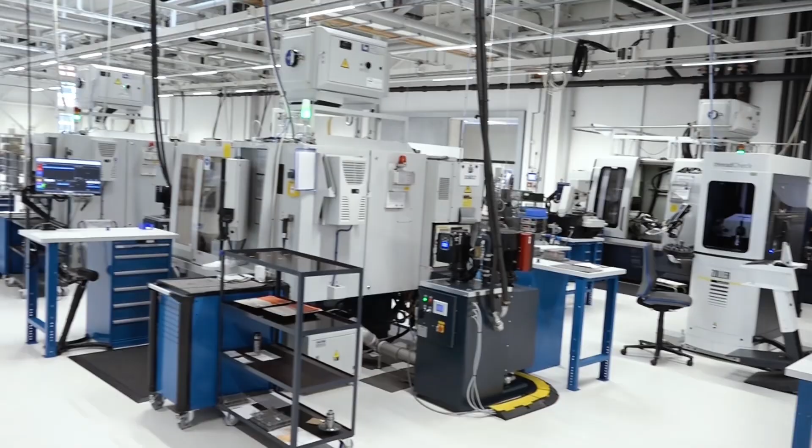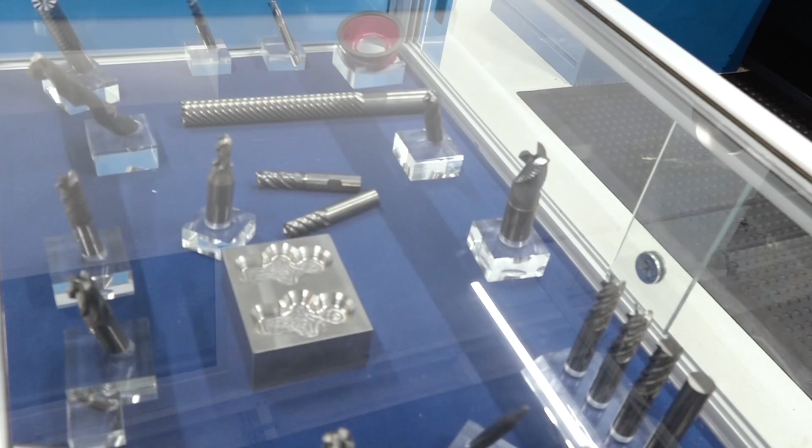Absolutely, for the audience that's for sure. I'm already seeing dozens and dozens of grinding machines, which is obviously the core of what you're doing here. Absolutely, solid carbide is our passion for precision. You see here different tools, mostly different diameters and lengths, but more of the bigger ones here. So there's really powerful grinding technology going on with these Rheinecker machines here.

You see also how we produce those tools. First of all, there's always a rod, and we put it in the machine's clamping system, then we go with the grinding wheel in a slotting process. So the main material of the tool gets removed, and then finally we sharpen and finish the front part of the tool. You see the ones with a lot of teeth here, those are finishing tools. We grind for such a tool about 60 minutes, so an hour for one tool. There are other ones we produce faster, but it's really different here.

You know, I come from the machining world, and currently we discuss all the time doing things in one operation and reducing cycle time. Are you doing the same thing inside the grinding machines, putting in raw material and taking out a finished cutting tool, doing your very best to combine operations and take cycle times from say 30 minutes to 5 minutes? Are you doing all of that to keep your production up with the demands, because you guys continue to grow globally?

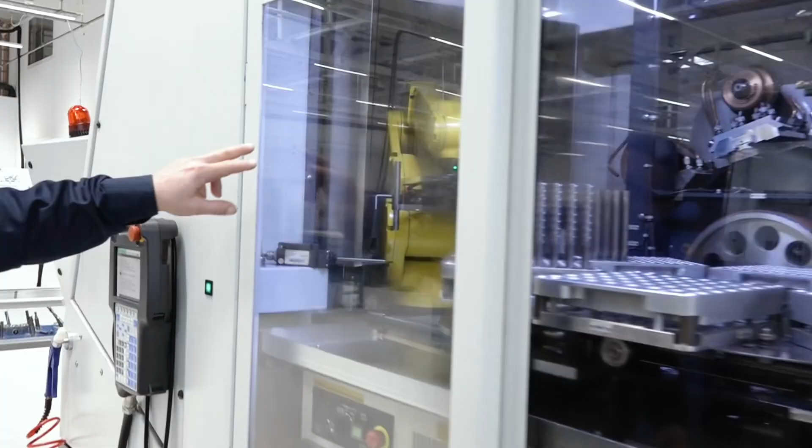Yeah, absolutely, it's important. We're standing here in the Switzerland production, and you know, the salary is part of the price to produce out of Switzerland. Most of our products go out to Europe, the United States, China. I have international competition, and producing out of Switzerland is expensive, so we have to optimize our process. Therefore, automation is really important. When you look in a machine like that, you see the robot still holding the rod prepared for its operation, and at the back side we see the different grinding wheel packages. We've optimized during the last year not only the grinding strategy but also the grinding wheels, with metal bonded wheels that we can dress with EDM technology.

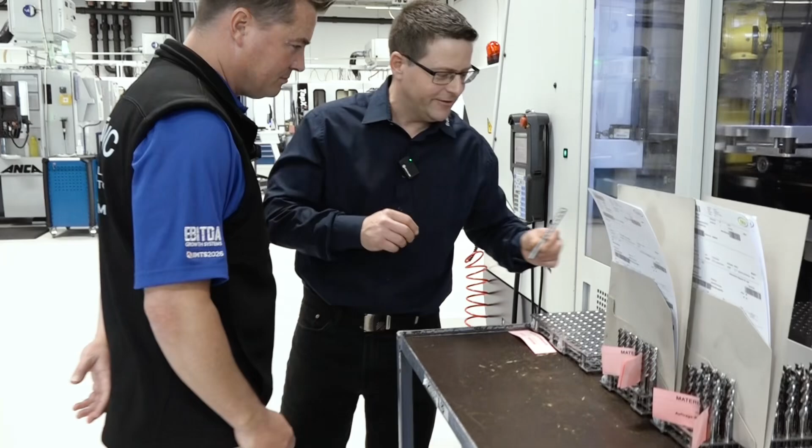So that's really important, and I look at those products here. This is a multifunctional tool, not so sharp, it's a steel end mill. So Tony, don't worry, I have sharper ones. Good news, thank you. Yeah, but I'll show you that afterwards. This one on a machine is also 6.3 times the diameter in length of cut, so your machine can cut a workpiece in a whole. But what does that mean for us here? I also have to grind that really long cutting edge, so that takes a lot of time.

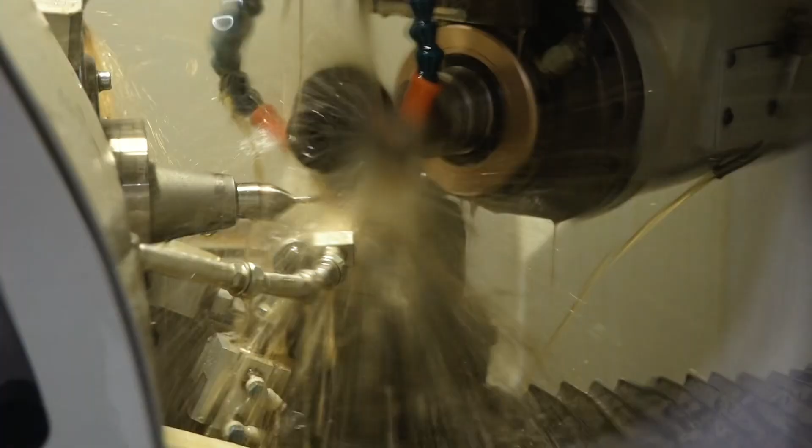It's really important that we are performant with our grinding strategy. Stefan, coming from a machinist background, in my younger days I would hesitate to utilize this tool at full cut. But you would advise people to utilize the whole thing, wouldn't you? Yep, absolutely. And that goes into your strategies and quality as well.

The grinding part, Tony, is one thing. The developing before, that's the whole story - to create a tool which is able to do that not only once or twice, but every day. What does that mean? I have to offer the product also knowledge - how you have to do the strategy, the programming, all that. We will see that later. That's a main part of our intention at Fraisa - giving not only high performance products, but also knowledge on how to use them.

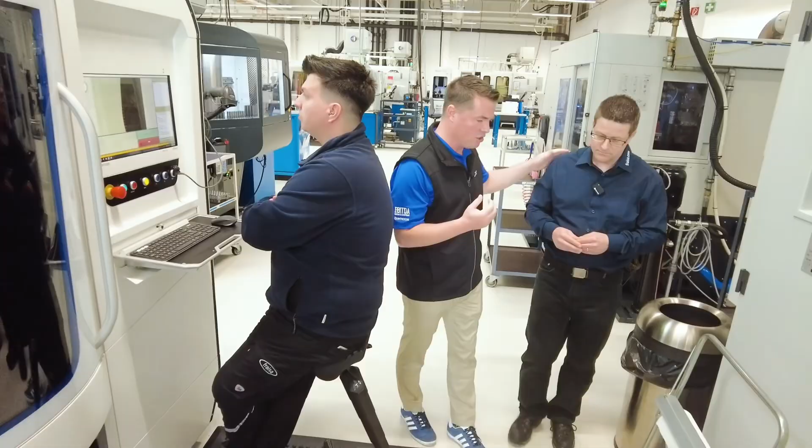Stefan, that is one of the major details I want to talk with you about on this tour - the in-depth wisdom that you and your team have here that you provide to your customers. You have milling strategies, you don't just offer a cutting tool. I used to get cutting tools and have to figure it out on my own, but you offer milling strategies.

Now that's a segue we're going to talk about in a minute, because I want to step back to the importance of automation. You've already pointed out the robots. I look around and I see them everywhere throughout the facility. I see a few people here, but a majority of those machines are running on their own. What do you think is the importance of automation here?

The importance of automation is for sure the infrastructure, but on the other hand also products that can integrate into an automated production. So in development I still have to think how I can produce this tool, in which tolerances I have to be really precise, and where perhaps I have a bit more possibility to increase the tolerance. So focusing on the production development is really important.

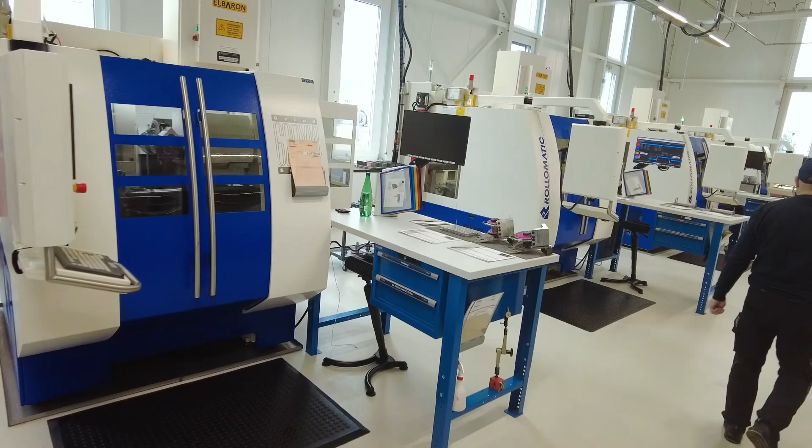And on the other hand, we invest a lot of time yearly to make automation better combined. You see here, for example, our smart pallets - perhaps we go over there, we will see that. So I know at the beginning of a production, here with its smart pallet, you see the RFID chip on it.

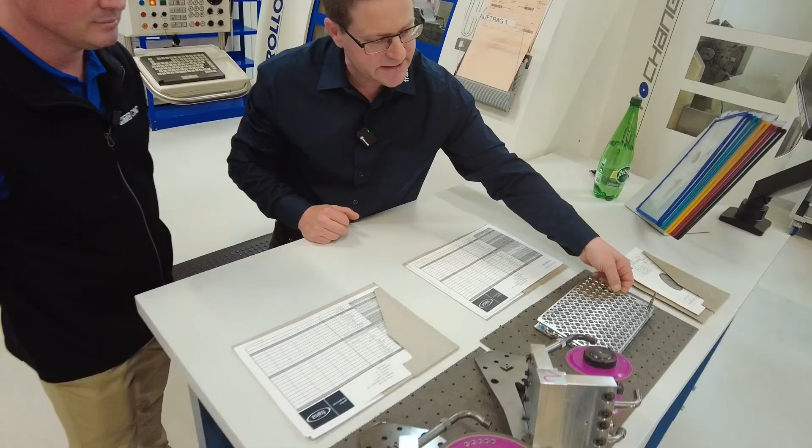So the tool rods get prepared before, also with the robot, in the smart pallet, and from the beginning on I know exactly - this is this tool, this is this order, the machine knows it, and finally this pallet goes until the end of production with the tool. So that's also one part of automation. And you see here also the grinding wheels - the grinding wheel is such an important element of our production for the quality, for the wear, the stability of the process. So all of this combined finally makes automation even more performant than we've had in the past.

Truly a great answer, Stefan. Thank you for sharing that. Let's slide over this direction - we have so much to see today.

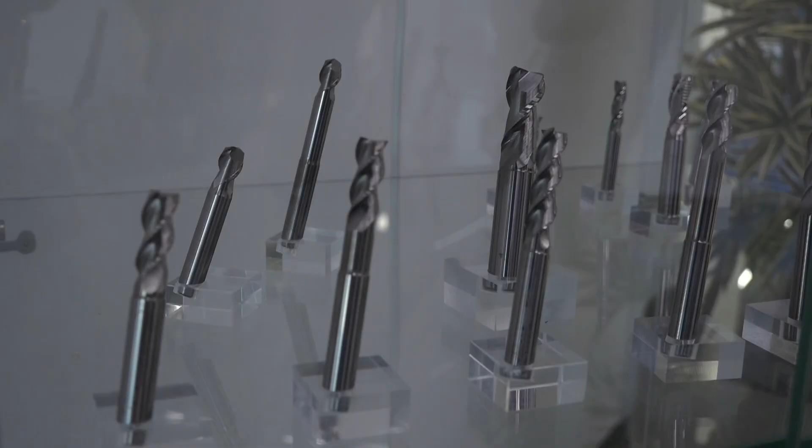And I want to go back to what I segued to before, because when I think about Fraisa, I think about a company that started in 1934 - so we're over 90 years of development, and you guys pride yourselves on being the best. This quality product, from the design, from the automation, to the coating, which is so important, to being able to measure everything, because you can't make something if you can't measure something, right?

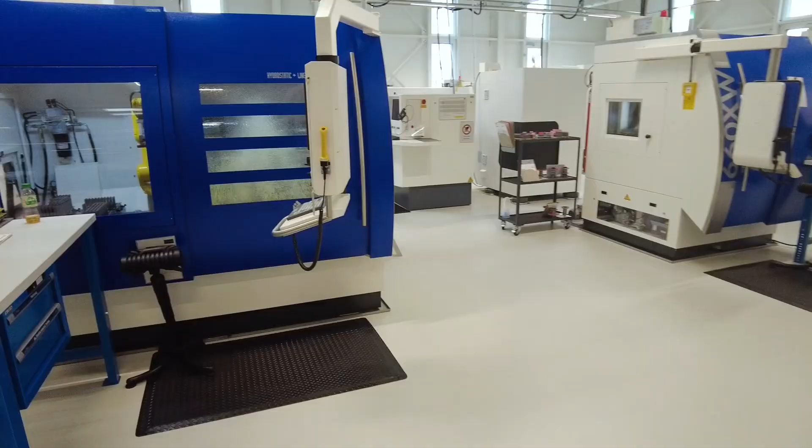Absolutely. And your philosophy, stepping back to what we brought up earlier, is you want to make sure that when people work with you, they have a full solution. You've created the ability on your website to pick a tool and understand the tool and understand the process. It's not just about giving you a call and saying, hey man, I need a 10 millimeter tool and I'm cutting aluminum, or as we say in Europe, aluminium, right? But it's not - we're not doing that here.

You are giving a full solution. Can you describe to the audience what 90 plus years of dedication to that understanding and partnership does for anyone who invests in a partnership with Fraisa? Yes, thank you very much, Tony, for giving this question.

The basis of all that is 90 years of experience and culture.

We began with the technology, the tool technology, the performance. That is the base. A tool has to work daily and annually, always on the same performance level. But that's not enough. The performance level today is so high.

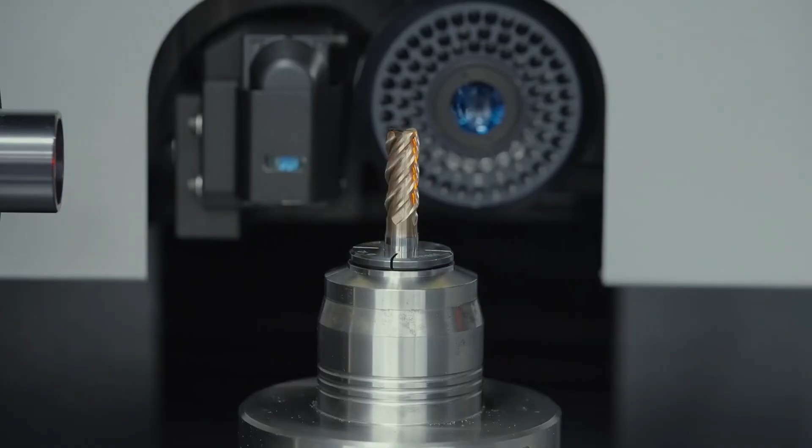The question is always how we transfer this performance level to all our customers. So we have to give knowledge with it, and we integrate that into our tool expert, our tool software.

Therefore we invest a lot in trials and developments to do that. But finally we need partners to create this whole story, this milling system. We need partners in automatization, in production technology, and also in applications technology. We can't do that ourselves.

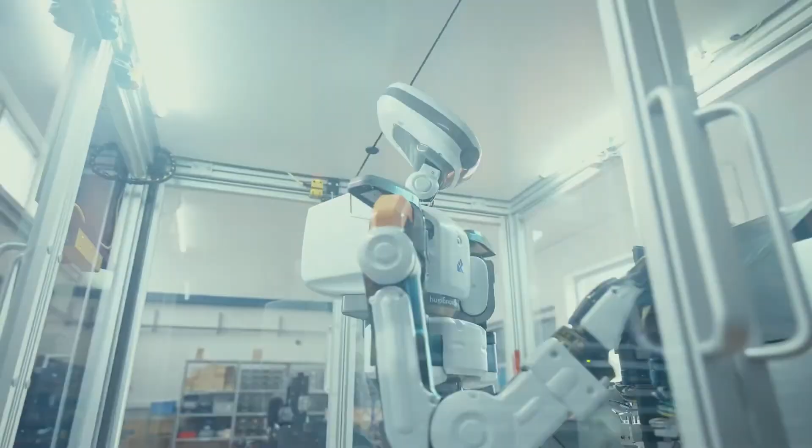And one important part: it doesn't help if we are just freaks and specialists in here. We have to transfer it to the market, and therefore our sales and application engineers are daily with our customers, guiding them, helping them implement those products with this quality and performance, understanding their needs and problems, helping them and giving us feedback. So that's a sharing of knowledge, of culture, of willingness to go together into the future.

That's what we stand for. We are really open to discuss, always with transparency, what is to do, where we want to go, where perhaps we have certain opportunities to work on. And then we go into it and always stay critical and validate ourselves to guarantee quality.

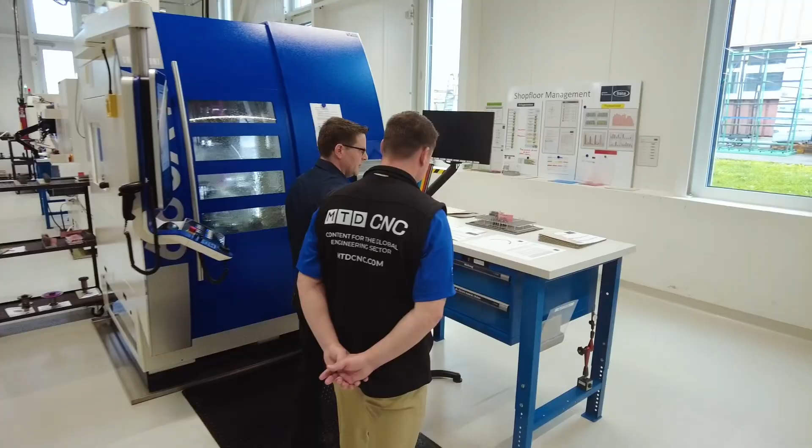I can give you an example, this tool. This is a high precision ball nose tool. It's not the most precise one we do, but you see here the tolerance we've got. We are talking about microns here.

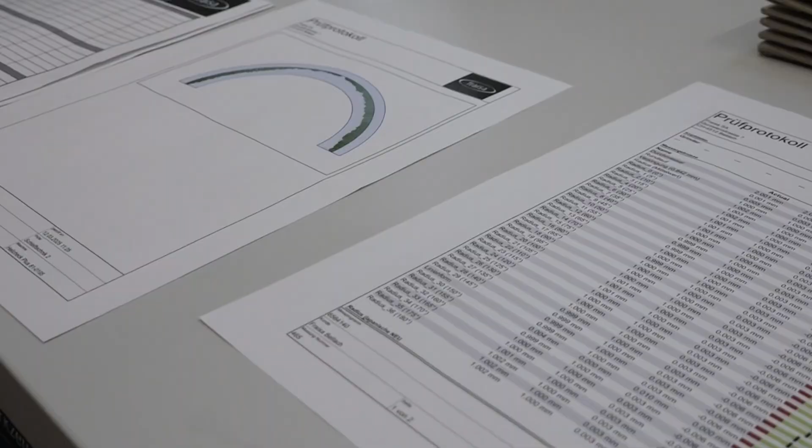The radius of the tool is plus 3 micron, minus 6, and here it's measured, and that's also a Fraisa element. The tolerance of a ball nose is over the whole nose, and you know, with two teeth, it's really difficult to hold in the front of the tool.

Look at how many measure points it takes to hold exactly this tolerance. For our customers, it's so important that they can get exactly this diameter, program it in a CAM program, and know the mold will finally be in the exact quality they need.

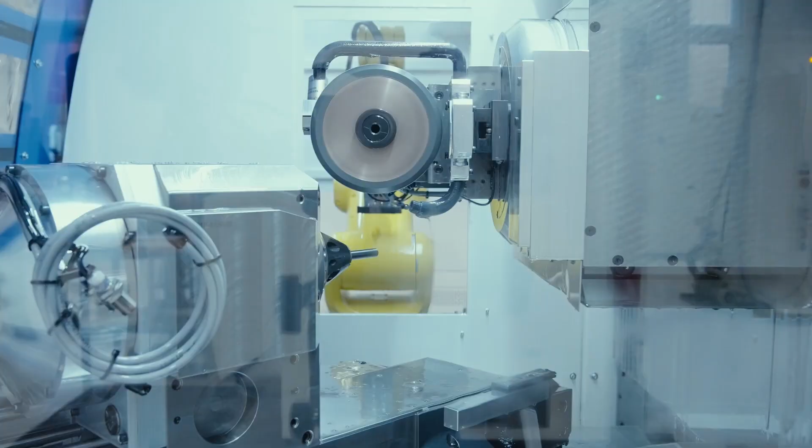So that's also a service we give with our products. The performance and tool lifetime of the products has to be state of the art, but here that's an additional one.

Something I want to slide into, because we're going to head in the general direction of grinding, and that's another one of your areas that's quite fascinating to me. But along this journey, I want to talk a little bit about your eco-friendliness and your awareness of energy consumption.

Energy consumption has been an issue around the world over the last few years, with costs doubling, tripling, quadrupling. It's very important to you at Fraisa and to some of the partners here in Switzerland to do everything you can to reduce costs. Would you describe what efforts go into designing a cutting tool to reduce energy by maybe 20%, 10%, or 30%? And can you translate that for the audience so they understand what that 20% means, maybe in terms of driving a car?

Yeah, absolutely, Tony. Thank you very much. That's also a personal intention, to reduce energy consumption, and we still have a lot of possibilities to do that. I can give you an example.

I developed a tool concept that we launched in 2023, named eCut for Alu, for aluminum machining. The task was to make a really smooth cutting tool, smoother than anything we'd achieved until now. In the past we always added a bit more security pressure, a bigger rake angle on the tool, so that was okay. But with this new development, we reduced the consumption of spindle power by 20%.

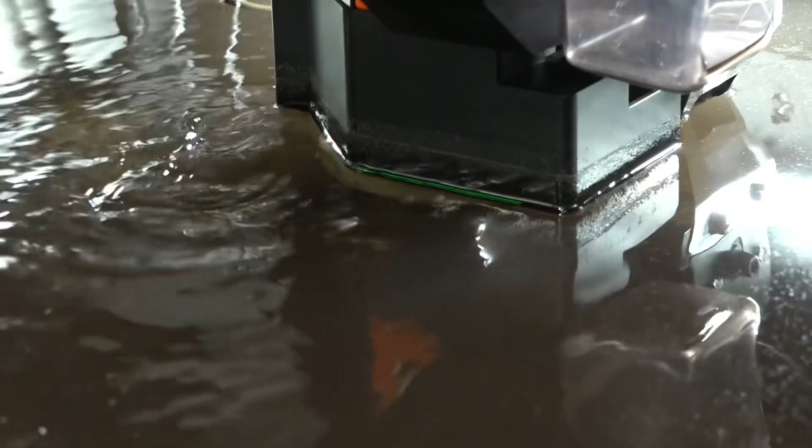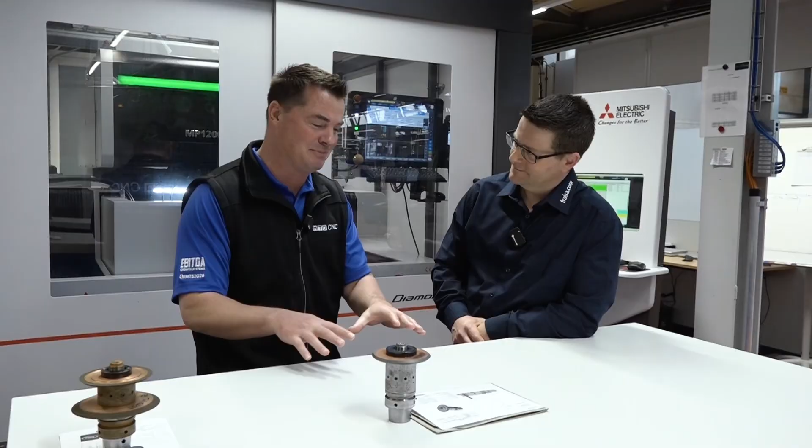You're far more familiar with this than I am, but I know the concepts of machining a part and the concept of making a tool have a lot of similarities. You're constantly trying to multitask inside a machine to create new geometries, for eco-friendliness, for part production, or for longer tool life. In the industry we're in right now, a lot of folks would probably agree there's a constant competition between software, cutting tools, and machines. At some point the machines are ahead of the other parts, and sometimes the software is ahead. Currently, cutting tools are ahead of everyone, so everyone else is trying to catch up at the moment.

So instead of making the coolest and best technology, what you are doing is really trying to figure out how to make these tools last longer and how to make more of them within a machine in a shorter amount of time. And that's the concept of this whole grinding area, isn't it?

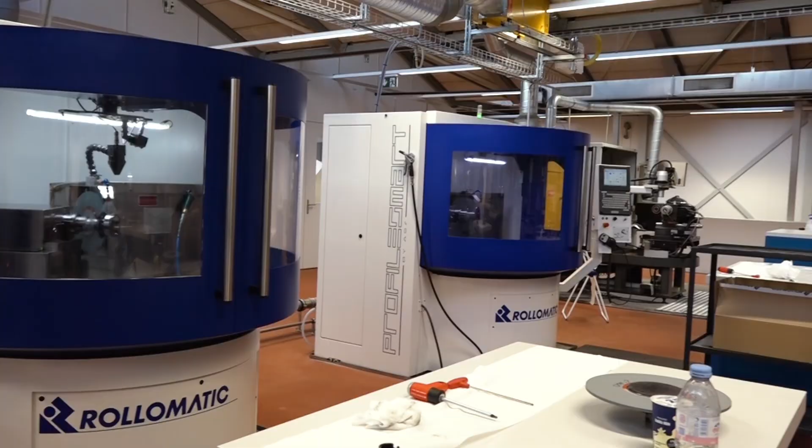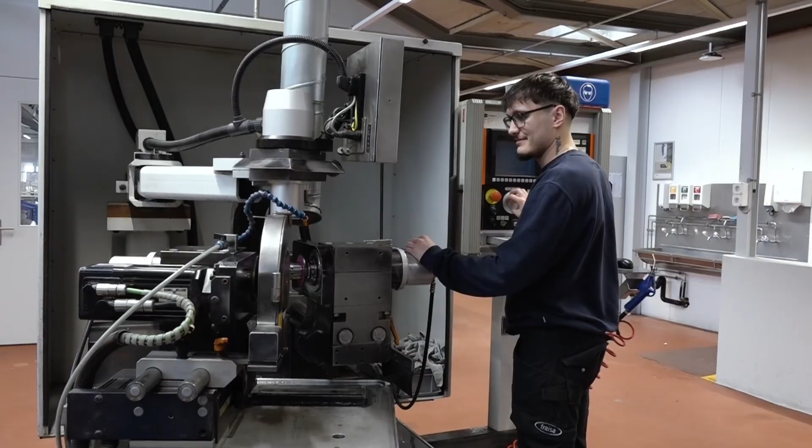Yeah, absolutely. The grinding wheel and the perfectly dressed grinding wheel is the base. You saw all the machines there and the tools there - without the grinding wheel, they don't work, nothing happens. So therefore this department here is named the Grinding Wheel Competence Center. The dressing of a grinding wheel, the quality of the grinding wheel is so important, because you want to hold this tolerance, as we saw before, those microns during the whole series of production of those end mills.

And therefore those specialists have special grinding wheels also developed with our partners. Their partnership is important too - we can't do that ourselves. We receive the grinding wheels, metal bound grinding wheels, or dual grain grinding wheels. This, for example, is something really special.

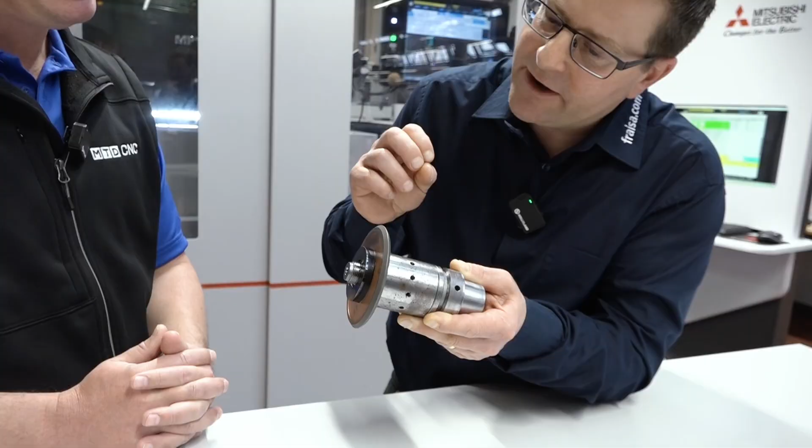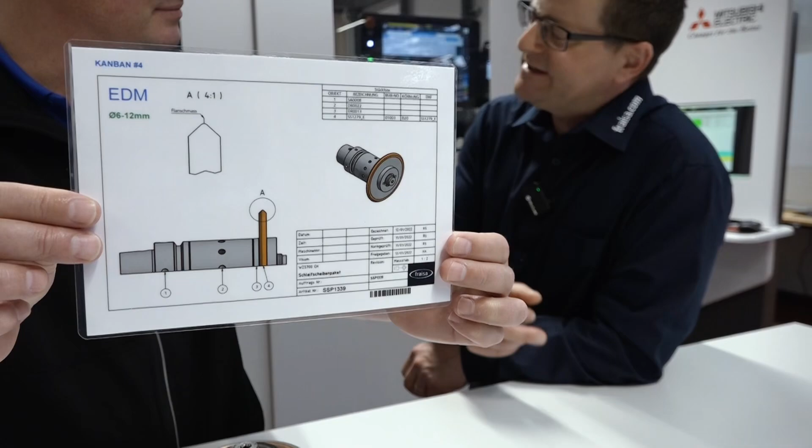This is a grinding wheel for a chip breaker, for a special chip breaker system that we developed. I'll show you that afterwards on a machine, and I have high-speed camera sequences showing you what's going on with such a chip breaker. But look at that - that is such a special form of this chip breaker, so smooth are the transitions.

And we developed - I invested about 7 years. Seven years, I lost a lot of my lifetime years. But Tony, you know, we are all fascinated, so I invest that gladly.

Amazing, amazing. All right, let's slide over this way, Stefan, as we move into an area which I would lightly describe as the beginning of the end process, where we're starting to clean it, where we're starting to put on coatings, where we're starting to package it, and we're going to show all this.

Would you mind describing your company culture here as well? Because you've recently won an award that I would describe as for the people, by the people, where there's an anonymous posting process - and you know how mean people can be online when they have no regard for anyone because you don't know where it's coming from - and yet you guys won that award because your culture here, you really take care of one another. Yeah, absolutely. Look, you see a lot of machines, you see a lot of technology, but the core is still the human, the teamwork.

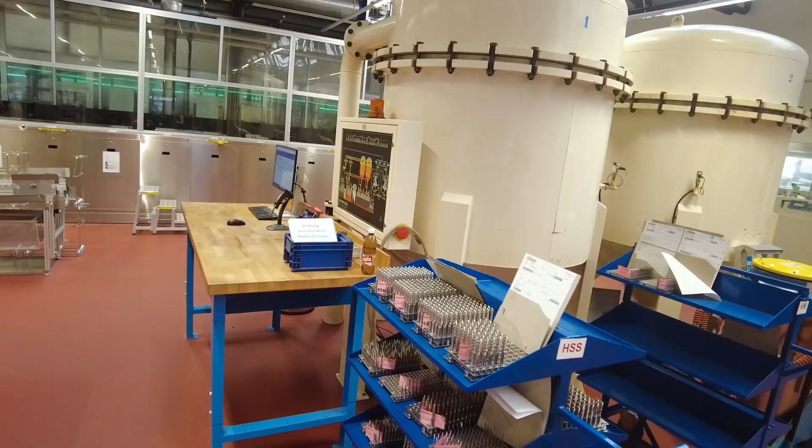I can't do that myself all alone. I need everyone setting up the cleaning process. For example, this machine, this specially developed cleaning process with over 13 cleaning steps to guarantee that the tool is really well cleaned before we apply the coating. So I need partners, I need humans, and it goes on finally in the production, so that I can guarantee every day the same quality of performance.

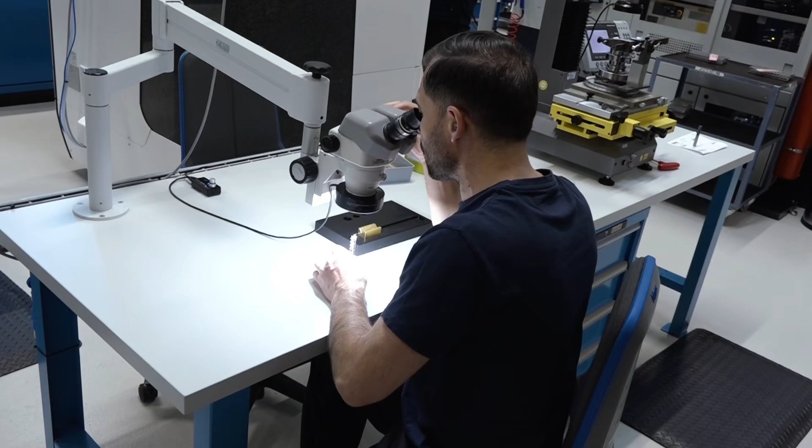I need humans. Also the measuring, I have to develop the measuring method too. I need people that can interpret the results of what they're doing. And therefore we need teamwork, transparency, but for sure we also need process. And that has a lot to do with culture, Tony. Be open, be transparent, talk about what's not going really well, but always do that in a manner of fairness and respect.

Very, very well said. I had to take a moment of silence listening to you because I love the culture here. You say it out loud, but I can see it in all the people around as well. Every time you walk into a room, people are smiling, working diligently. They look like they love their jobs.

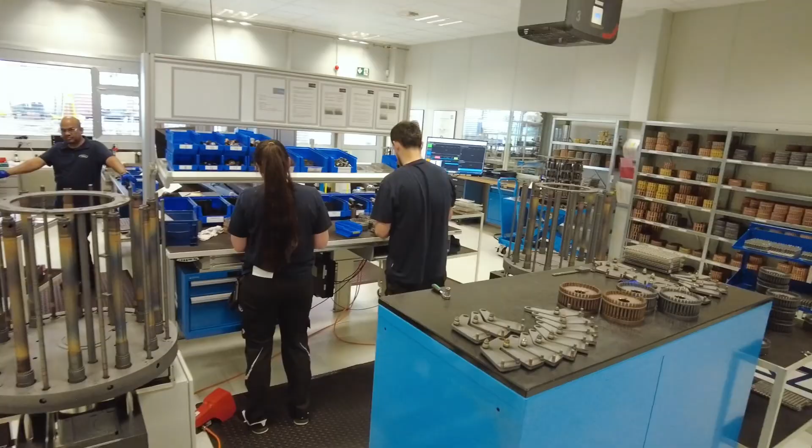But let's segue a little bit from the culture and people to actually what the audience is looking at right now. In this room, we can't touch a thing, can we? No fingers. Absolutely. Put your hands in your pockets, right?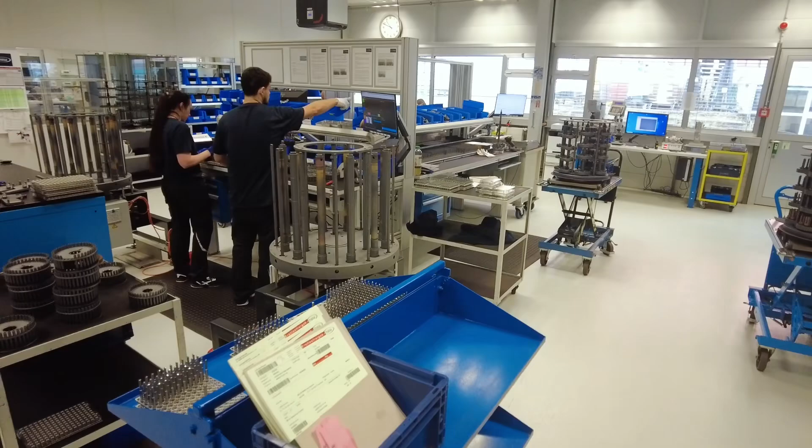You're absolutely right, Tony. So here all the colleagues are preparing the satellites to then finally apply our high performance coatings on a tool. You'll see them wearing gloves here. If you touch a tool, even your fingerprint on it can damage a whole coating charge that we're processing in this room. It's so delicate, you can't imagine how delicate it is when a tool isn't cleaned really precisely.

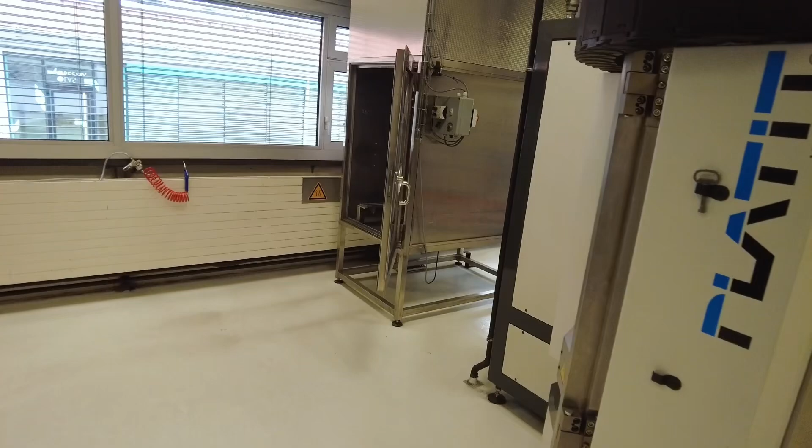You don't see a lot here now, but we are in our coating department. You see different machines running, applying our coating recipes. A recipe uses several hours here to put the coating on a tool, and the influence of a coating is incredible - for the tool lifetime, for the performance, and also for the reduction of energy consumption, because modern coatings are so thin and so fine that it has a big influence on the evacuation of the chips out of the tool. So we invest in our own development, for sure also with partners, but that's a core element of our production.

Just for fun, if I was to take 100% of a process, what percent of that would you label the importance of the coating? It's a really big one. Yeah, it's a really big one.

For sure, we have the substrate, we have the geometry, and we have also the coating influence. So if you don't have good raw material, as always, then you lose performance. But a coating is a main part, I would say. I can't say directly a percentage, it depends also on the tool type, the machining material. But I would say it could be in certain cases 50%.

So really impressive, the influence of the coating.

And from the outside looking in, Stefan, when I think about a process that certainly you know more than I do - I mean 20 plus years, the company's been around for darn near, it's been over 90 years. I was going to say darn near 100 at this point, and by the time some people watch this video, it might be - this video will live forever. But when I think about that, I think geometry has been around a long time. There's a lot of mathematicians out there, a lot of science that goes into the certain angles presented to make the right cuts and the correct materials. But I almost feel like coating can be a secret sauce as well. Maybe that area is a piece of also why you're so globally successful and known as, if not the best, one of the best cutting tool companies in the world.

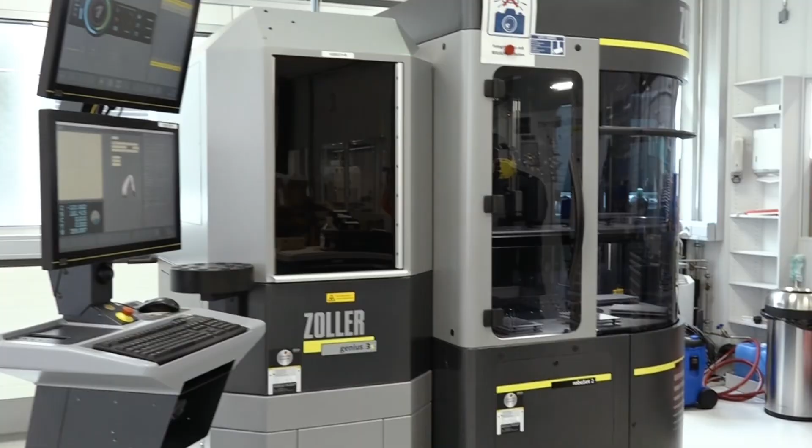I can measure that with a 3D scanner, more for macro geometries, and compare them. But we've also got really precise measuring machines here, where I can measure less than a micron because of the geometrical technologies we have today. Elementary influences, like a supporting chamfer of a tool, are really complicated to measure and reproduce, and there the geometry is the big influence. On the other hand, when machining stainless steel, titanium, or nickel-based alloys, the coating is really important too.

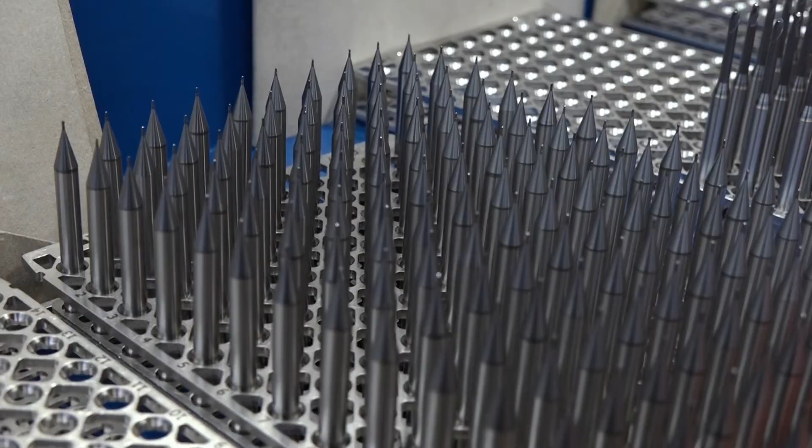So I think it's important to know, for each application, which tool elements are key. We talked before about efficiency in production too, so always making tolerances smaller isn't a good way. You have to know where precision is important and where it isn't, so we can also optimize the production of tools.

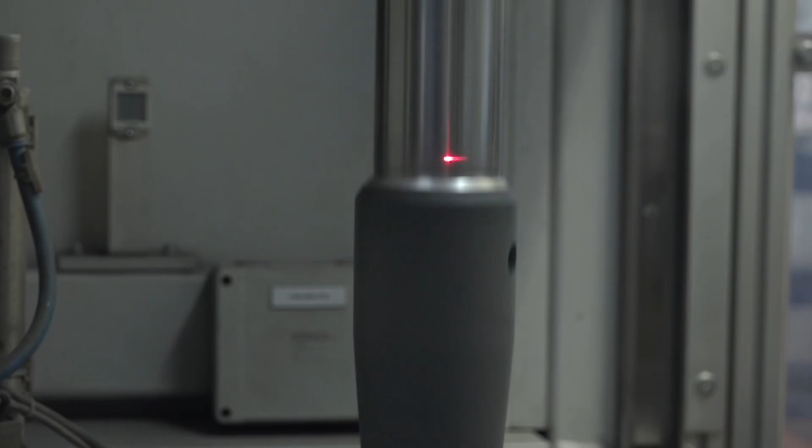This is why I bring people like you on camera, because you're the expert and we get to learn so much together. So this is the quality department. We're going to head to packaging, but I bet these guys would argue they're the most important people here, right, the quality department? I see them smiling - they know the importance of what they do.

All right, packaging. Man, I got to be honest, when I did packaging I was doing it by hand. You were doing everything within a system here, and you're even being eco-friendly about that. Can we walk through and describe the process here?

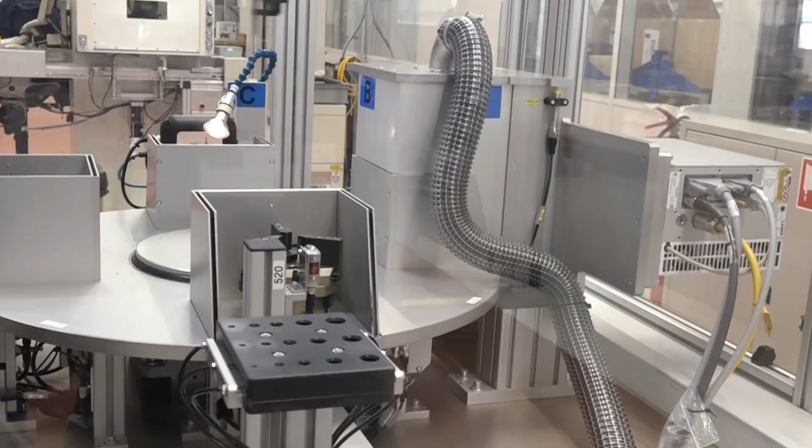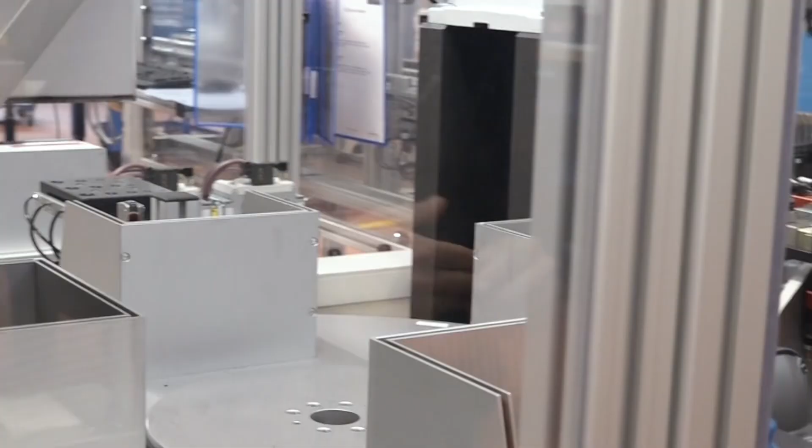Yeah, absolutely. Look here, the tools are coming, they're now finished coating - look at the golden shining tools you're seeing, I think that's a diameter 3 or something like that. The tools get picked by the robot and go directly into this part of the machine - that's the laser, putting a unique number on every tool. So I know finally this tool has its own number, and in 10 years when it's still in use, I can say it was produced on the 13th of March.

And then it goes through the station here. This one is a little bit special - it goes into the packaging, the blue one, into the package, to close the package.

You know, while we move to this next section, I can move almost as quick as that robot. How about you? Yeah, well, I'm almost as quick, I could probably do close to the same. Obviously I'm kidding, that thing is flying.

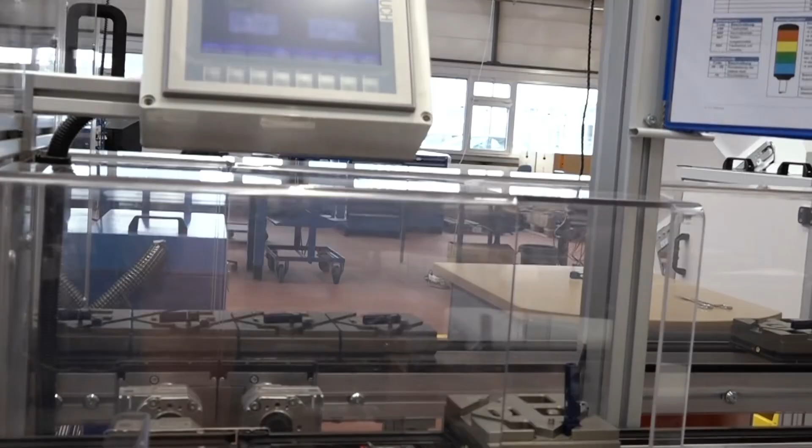It's flying, that's really fast, and he doesn't have to go to the restroom - he doesn't stop in the evening, he works on, and that's the big difference. Even if the robot is a little bit less faster than you, he works. And that's also boring work - we're always saying here, Tony, the boring work has to be done by a robot. Dull, dirty, dangerous, right? Absolutely.

And we have a lot of other stuff our good colleagues still do here. So eco-friendly packaging, correct? Absolutely, eco-friendly packaging, recycled packaging.

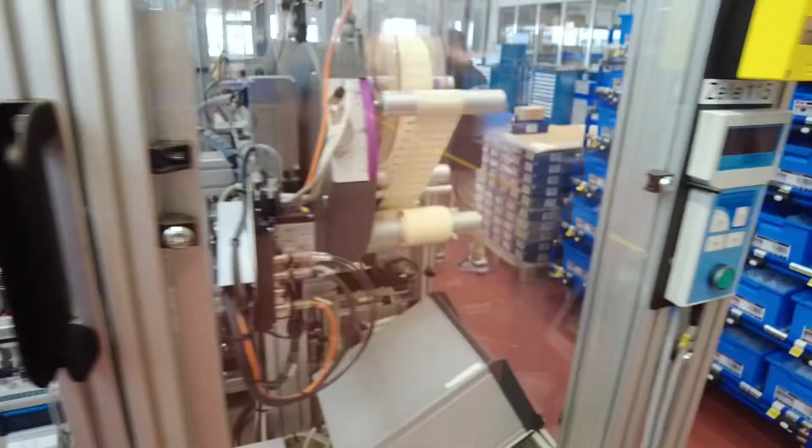Well, it looks like we're getting to a completed product, which means we're probably getting to the end of the tour as you've taken us all the way through. And I see that when a product gets completed, all the data is collected from that as well. Absolutely, all the data for every single product is finally saved, stored in a database.

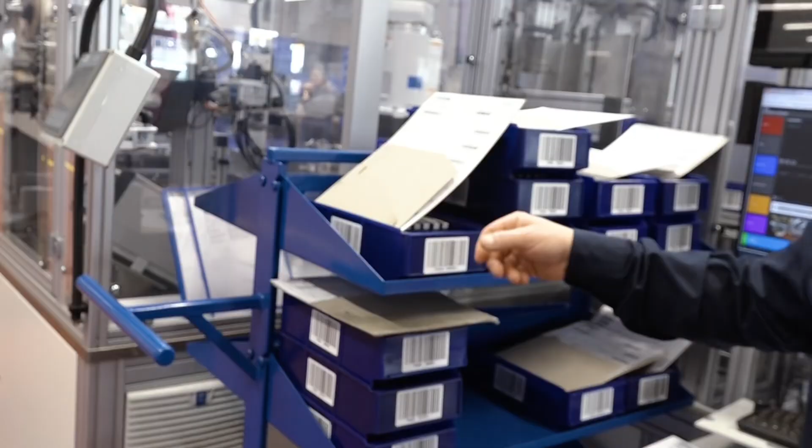But Tony, yeah, the product here is finished - the package goes finally to stock, and our customer can order the product. Yeah, beautiful, well packaged, but it's not yet finished, Tony. It looks finished, we made it to the end of the factory. No. What am I missing?

No, here it begins, Tony. What I want to do with the product sitting in packaging - we have to machine with it. And what does that machining mean? It means, Tony, that we need good employees, trained employees, new colleagues learning how to machine. You'll see also CNC programming, which you know well. A little bit. So we need knowledge, and therefore we have our department building up new apprenticeships here. One of my favorite topics, brother.

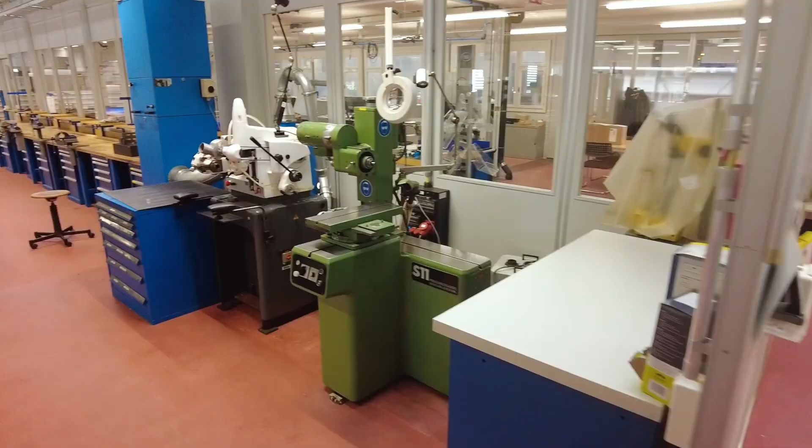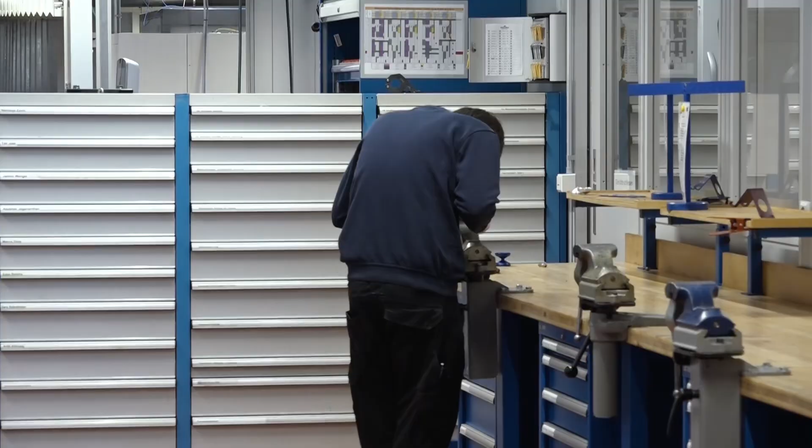I remember well in the 90s when I made my first CNC experience. Here you also see conventional machining, which is how we learned and we've kept it around. You feel the chips there - drilling, turning, and milling, also conventional. This is important still, that you have the feeling of what's going on, the forces, the temperature, and the mechanics - what it means when you turn a wheel and the material sticks up. So our colleagues learn how to handle all that, grinding competence, but also CNC competence.

Stefan, I think this is where we stop for now. But I think you have an entire machine shop we have to dive into, don't you? Absolutely, and that's my favorite day. Oh, I love that too. I like the production, that's necessary. But what's more beautiful than machining, making chips, understanding what's going on, and feeling the power we invest in it too. So Tony, let's go over to the lab and make some chips. Absolutely, man, let's go take a look. I'm very excited, thank you for that. Thank you for watching, stay tuned for that video as well. We're headed there right now.

It feels like home, I tell you, the machine shop feels like home here. Here we are, Tony. Yes. Welcome back. Great, I'm so excited to film this video as well.

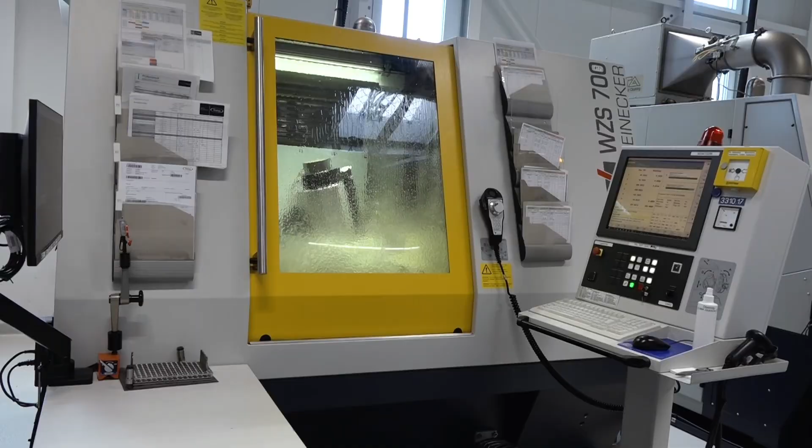R&D is one of my favorite topics because it's where we get to figure out what we're doing right or wrong. It's important to know both, and also important to know what's not good, because then you can prevent customers from issues with those products. You saw we produce really nice tools, and without developing, it's not possible today. You can't develop a tool on a green table and just put it in a catalog - that's not a good idea. So we invest a lot of time in this department, R&D - really strategic trials, really analytics, not just playing the same way every day.

Stefan, I want you to clarify a rumor for me - I've heard that you guys actually do R&D 2 to 3 years into the future to make sure all these tests are done correctly before ever releasing something. Yeah, absolutely, that's true. I'm finished now, beginning of 25, with the products for '26. That's still being developed - I'm working on '27, '28 developments now. It takes time to understand.

A product I'll show you afterwards on a machine, I develop over 12 to 24 months, and make about 70 prototypes to finally define the product, reproduce it, and know the technology. Because I don't just have diameter 10, I've got it from 2 up to 20, from short to long - you saw the 6.3 times diameter over there. So that means you have to test it, otherwise you won't have a good feeling putting it on the market, you don't sleep well at night. I couldn't imagine throwing something out into the wild and saying 'good luck, we think it works, but you go spend a lot of money on our tools and try it out for us.' That's not how it works.

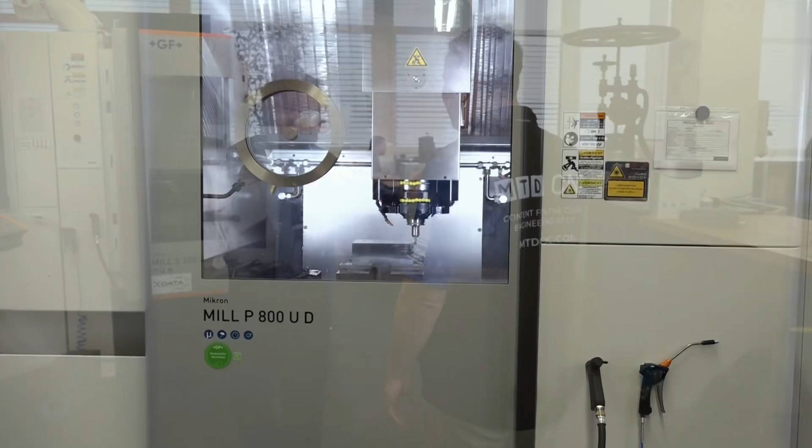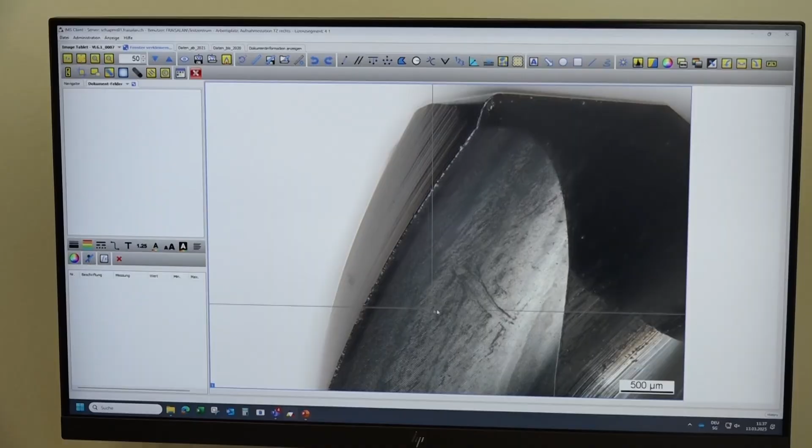Do you have a demo set up over here we can take a look at? Absolutely. Here are machines - they're machining for a certain time, the tool is in action, and then after a while we look at the wear. Wear analysis is still one of the most important things. You hear the noise, you can measure the consumption of power, force, and all that. Look at that now - 90 minutes machining in construction steel, which is not really easy to machine. You see the wear on the tool - look how regular this wear is, you don't see a lot of material addition here. So that's what we're doing.

We're machining, comparing tools, understanding the influence of the geometry - whether it has to be positive or not. And I told you in the production, Tony, about this chip breaking system for the automatization. So I've got an example here for you to show a little bit what that means.

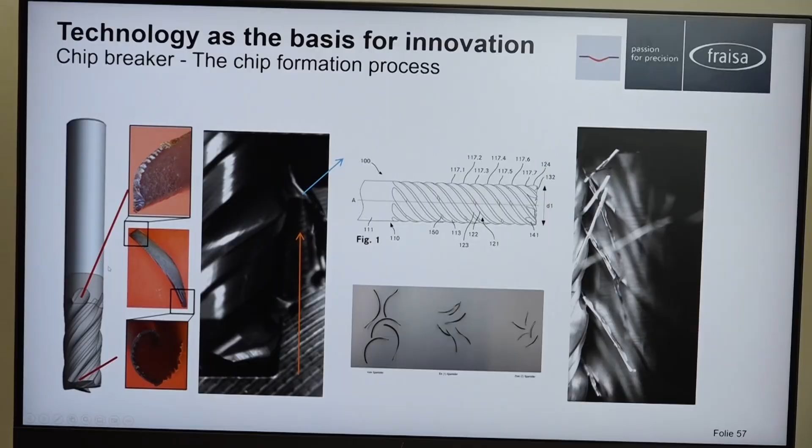So what we are seeing here is a tool, and you see here a chip built in the front part of the slot and in the end part of the slot. And when you look at that, how the chip gets formed—that's so impressive.

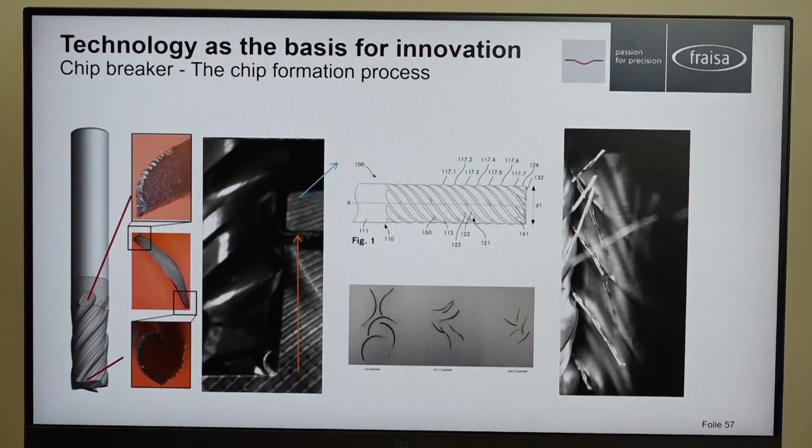It's incredibly impressive. I have a fast camera to do that—that's a really powerful camera to be able to collect that data. Absolutely, up to 200,000 pictures per second, Tony. So with a setup like that, really specialists can do that.

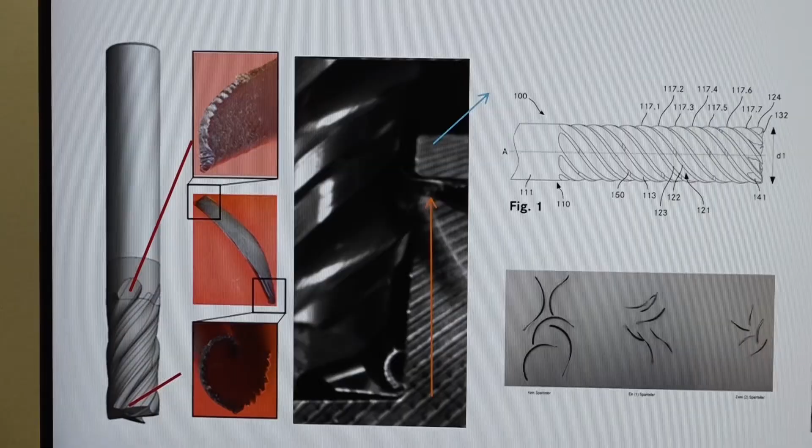So that's really helpful, you see a lot of things, but now look at that. The chip goes up in one way, so it's a long chip. Therefore, I have to integrate a chip breaker, interrupting this process, building the formation of a chip, and that is what we are seeing here on a second video. This is also a long tool in action, look at that, and then here you see finally the chip breaker—the chip gets broken, a new formation builds up, and like this we can cut the chip into several pieces.

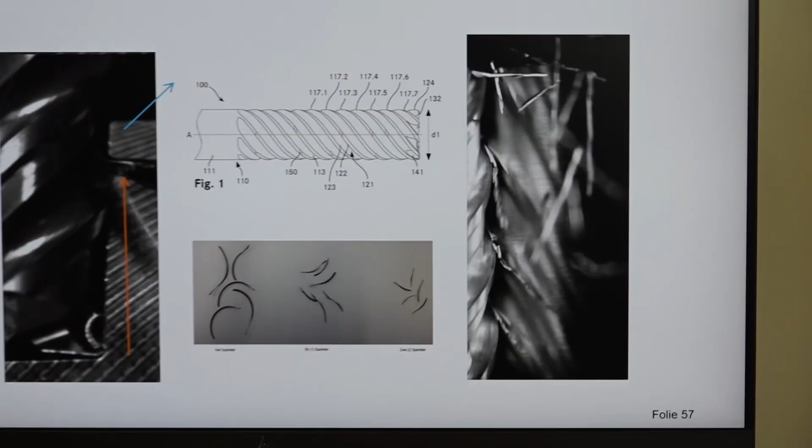That makes it more efficient to remove it out of the workpiece, out of the table of the machine, without interrupting the conveyor for the chip transportation. So technologies like that are really important to understand what's going on.

Would you say that recutting chips is one of the quickest ways to wear down a tool before anything else? That's why we're trying so often to either get coolant where it's supposed to be, use chip breakers, but regardless, we're trying to remove that material and get it out instead of rubbing or cutting the same chip twice and creating dullness in our tools.

Yeah, for sure—that's for the cutting edge going through its own chip securely. That's also the reason we integrate lubrication channels in most of our tools, and also the form of the chip. That's really important for a profile tool, for example. They can hook their own chip, and that's then finally a really bad situation when a chip can't be removed. So yes, that's our part here—thinking and looking at the chip formation, and it's really important.

I will show you afterwards a photo you will love. I love chips, Tony—I even go diving into the chips because it's such an important part of our work here. Perfect, let's continue our tour.

R&D is so fun, and I would pay to see you dive into a bucket of chips, by the way. Since you've already brought that up on camera, I'm gonna hold you to that. Yeah, we're gonna try and make that happen.

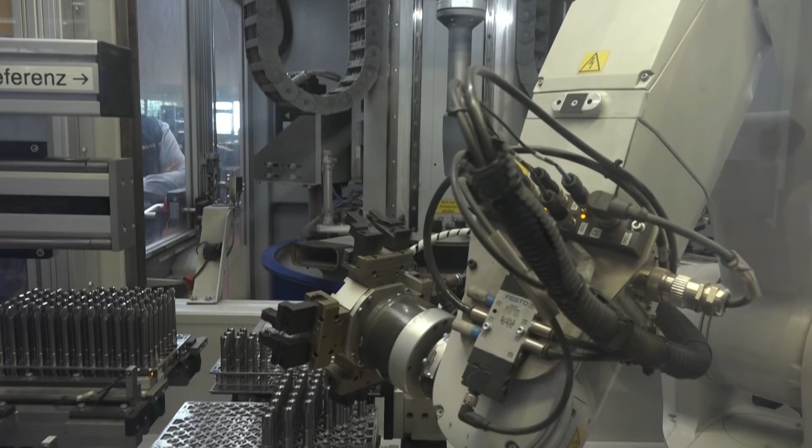All right, Stefan, I think of R&D, we're headed into production, but along this journey we've seen the production side of things, from you making the tools to utilizing the tools and testing the tools and packaging the tools and the automation, everything that goes into it. I've known you to be around for over 90 years now, and your dedication to your clients takes time, but it gives results, and it's a long-term relationship that you continue to build.

As a part of that, I've heard that you also do a retool—you make sure that if a customer invests in your high-quality product, they can utilize it more than once. They can send it back to you, use it 2-3 times. Now historically, when I was ordering tools, I always hesitated because I was told I was losing quality, but I'm not losing quality with you. I might use a little diameter, but can you describe your retool process?

Yes Tony, that's a really important discussion here. You see, we invest such a lot of energy producing those tools, so it's important that we can use this value that we invest several times. Therefore, it's its own part of the tool development that we develop the retool—the resharpening on one hand, but also the recoating—reproducing this 100% performance guarantee that we give to our customer. And yeah, we do that with our colleagues in Germany, where we run this retool process, and that we can guarantee this 100%.

I'm absolutely with you, because the diameter is less, the stability can't be the same, the deflection of the tool—that would have been my absolute question, with the same parameters. But you're absolutely right, we have to develop that, also changing small elements.

The tool doesn't look the same way, but it has to work the same way, and therefore we make validation. Every tool gets validated, and look here, Tony, what I've prepared. This is an example of a validation. What we are seeing here...

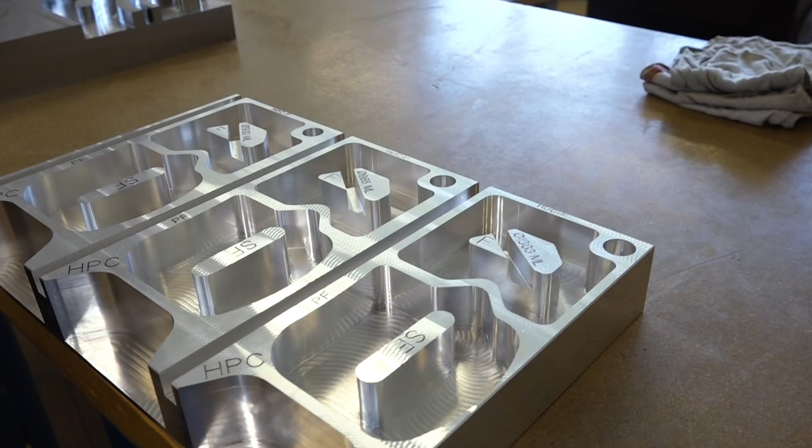We see here 3 times the same operation. The first one is a diameter 10, an HPC aluminum tool, really performant, and you see the different operations: roughing, high dynamic cutting, finishing, super finishing. Then we go to the next one, the 9.65, once reground, the diameter is less, and we test it with the same parameters and compare the performance. Finally it goes down to 9 millimeters, meaning 10% of the core of the tool is less, and even then we can guarantee the same performance, the same quality.

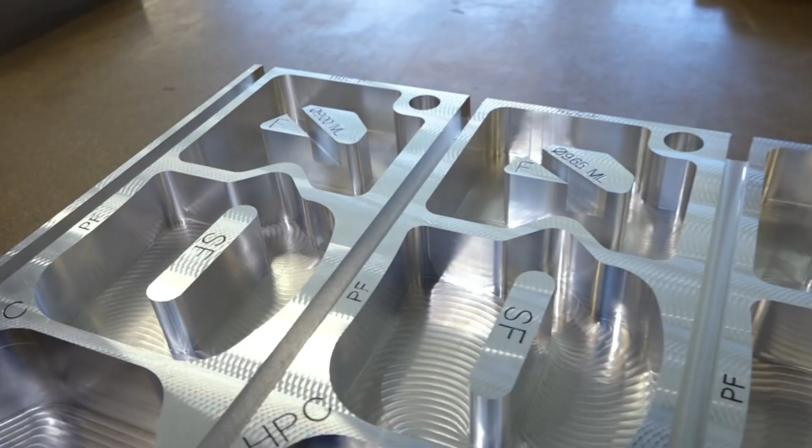Look at that shining, bright surface quality that we reach, and we are really proud of that. So that's for us a guarantee we give to our customer, and we test it also. It's not only something we're telling, it's something we make seriously, testing, and then finally guarantee to the customer this 100% performance guarantee of the retool.

Not only can I see your handsome face in the reflection of a super finish, but I'm saving a bit of money as well by utilizing this process, aren't I? Additionally, and that's a value that we're giving with our tool.

So regrinding a tool makes the price 30% less compared once again to a new one. So when you make the total cost calculation, you see that your price dramatically decreases, and the value is once again more sensible, also economically sensible.

And keeps the relationship going, I would imagine as well. If I'm going to invest in your product, and invest in retool, which means I'm going to stick around for a little while, right? You just showed me 2 to 3 opportunities for me to continue working with you. I'm saving money, I'm working with an amazing company, and I'm continuing to build that partnership. There's so many wins to the Retool program.

All right, now we're in production, and these guys, I think they all want to be on camera because they love the camera so much. So now we are in the freak department - that is one of the best, the stunning department. Here now comes the product to its presentation, and that's what we are doing.

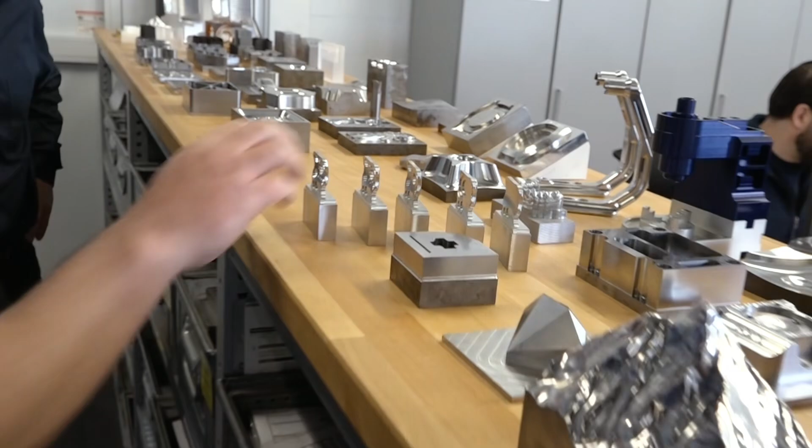Yeah, I would want to be a freak in here too, I gotta be honest. You're always welcome. Do you have any favorite projects here? As I look around, some of these are really cool. Look here, we machine high-speed steel, 66 Rockwell here. We go through it like butter. That's high-speed steel coated. That's incredible, that is a fun project.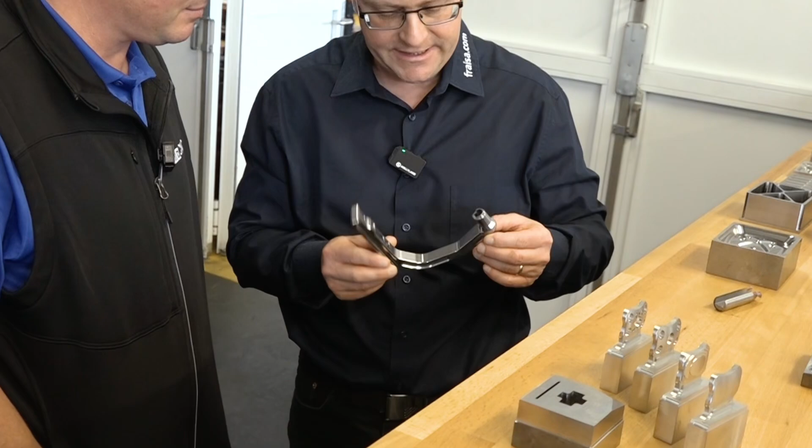Stuff like that here, this is the aiming device project we did together with our partners, especially REGO-FIX was integrated here. Also a Swiss project we've done, the Matterhorn - you have to visit, you know it? I do, I've seen this at my friends at REGO-FIX, in fact they just made me a small version of this. Yeah, you can increase it, decrease it as you want, but we machine also titanium.

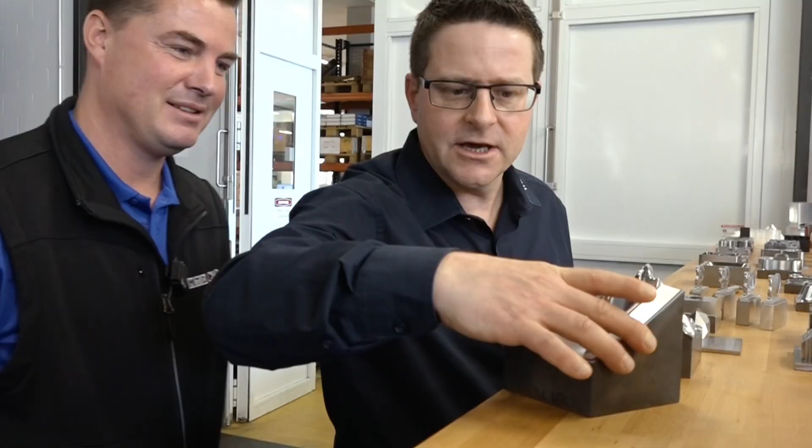Oh, look at that, look at the quality here, die mold. That's nothing polished, that's all machine. Straight off of the machine, no polishing.

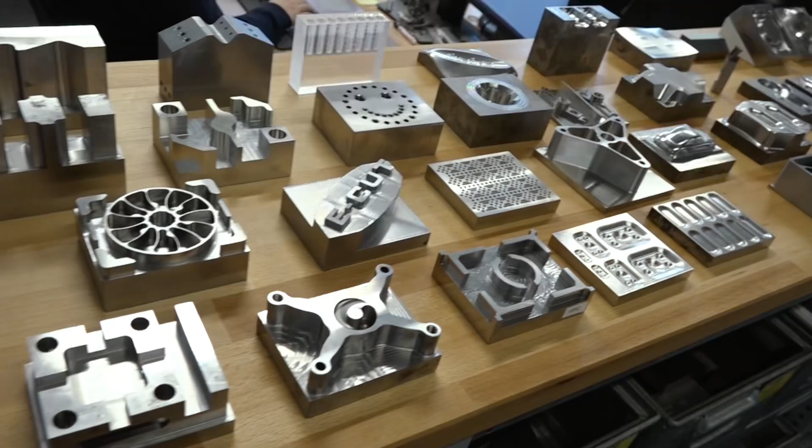Wow, impressive work. So I look here, and you've already mentioned several materials that you've plowed through with your cutting tools. If we spin only slightly, I see a whole wall of material, which I would assume is your investment in the testing process to make sure you're testing all the different materials. Absolutely, in our tool expert, in the cutting data software, more than 10,000 materials are integrated there, and material comparison.

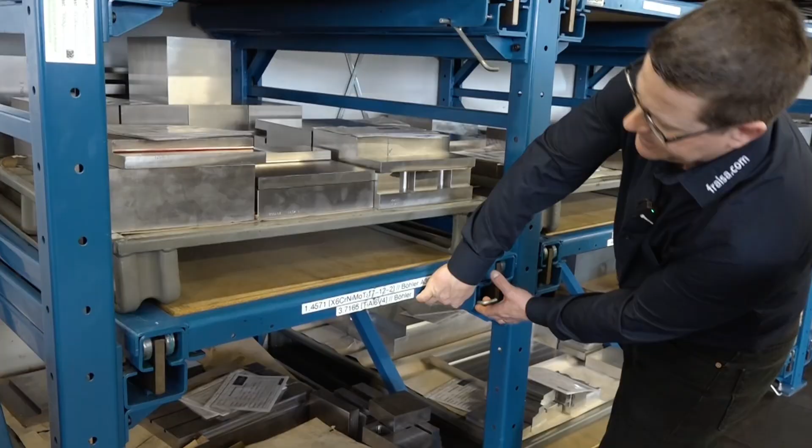How do you want to build up this competence? I have to take up quickly here a titanium, a stainless steel. Here this is aero aluminum, for example. So I can take it out, take it on a machine, stainless steel here, for example, or a block of titanium, making tests in it, understanding what's going on for sure. That is a huge cost component also.

But for us it's so important that we are understanding what's going on, and finally then also helping our customer be quicker, more safety in the production process.

What I'm realizing is that there are a lot of theories out there, a lot of beliefs. There's a lot of scientists that say my geometry will do a certain thing, a lot of coatings that say my coating will do a certain thing. And you guys say, well, let's put it to the test, let's see if that theory is real. I like that. And on top of that, if I look over my right shoulder and to my left here, you're going live to make sure everyone understands what you're working on and how they can embrace it also.

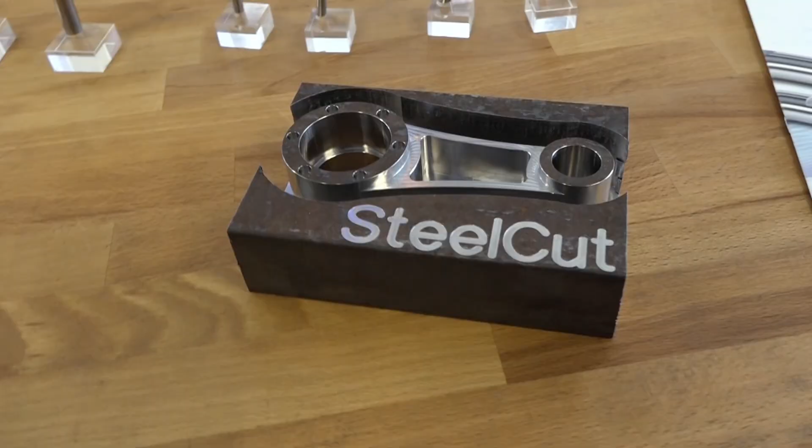That is a product not yet launched, so Tony exclusively here at the view on a new launch product, April. We are really proud. It's an end mill only for soft steel, construction steel - really difficult to machine because it's a horrible material. You have to be strong on the cut with it. So plug and play here - plug it in, play with it, it works, it pays off. That is important, and we share this knowledge also.

So therefore we invest also in applications technology for all our products here, from the small micro end mills, for example, cylindrical ones, or this high dynamic cutting strategy - really interesting with highest volume, but also a lot of challenge, I would say, for the tool side. Up to 60 Rockwell here, you see a different range of tools, and for every tool it's the same process.

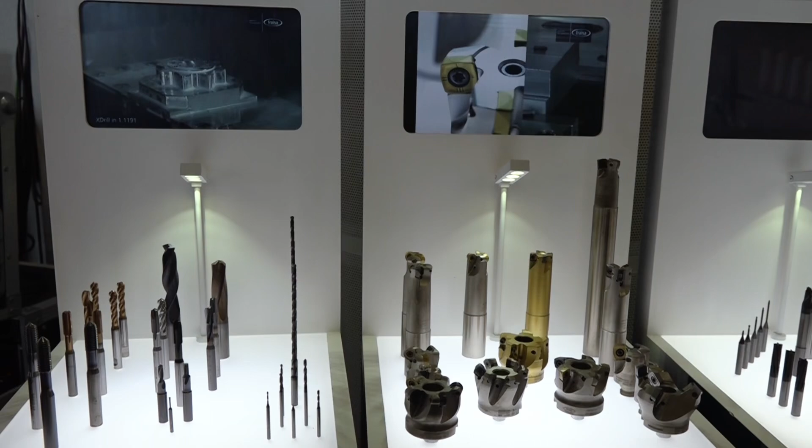Can I bring up something to you, a curiosity of mine? It's the fact that we all know some of the wisest, most seasoned machinists we've ever worked with are starting to retire. And there's this idea around the world that maybe we have a labor shortage or a skills gap. I would make the argument that you guys here at Fraisa, collecting all of this data - because it takes years and years to truly understand what a tool is supposed to sound like, what the vibration is supposed to be, how to utilize it economically - we've already talked in other areas about reduction to be eco-friendly, right? But it takes years. You guys are doing that for us. So if we have a struggle bringing in these expert machinists, in time they'll become that, but in the meantime you guys can be the experts for us in our machine shops. Am I correct in that thinking?

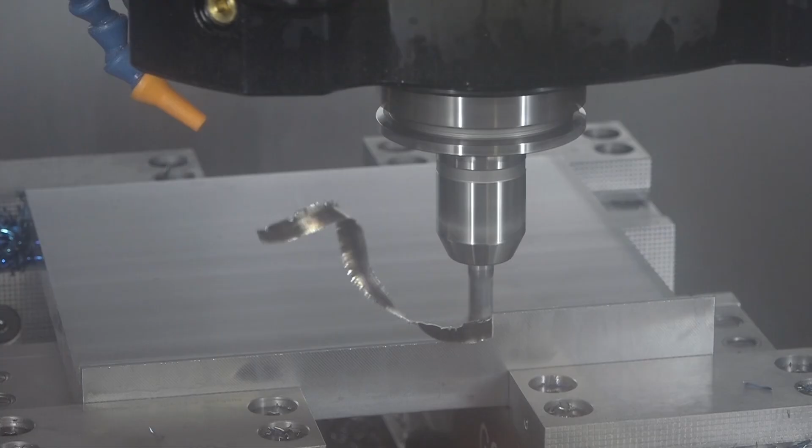Yeah, absolutely. That's an opportunity, but it's also a threat, a trap - so like always. I think it's important that we share more and more knowledge with our partners in the future, and that we understand where this voyage goes. Is it going, as many say, toward automatic programming, feature-based machining, all that stuff? But nevertheless, we always need data - how it works well and how it doesn't. And yes, there's a knowledge transformation going on, and we want to help hold and win new knowledge and transfer it to our customers, be in contact with them, and therefore we observe what's going on.

We collect our data through our tools, and hopefully in the future that will help us give support also to our customers. I appreciate you confirming my thought process, because you're so much wiser than I am.

Yeah. But have you ever played the game I Spy? Like, I spy something green, I spy with my little eye. Help me please. Well, I spy on this table a tool that I think we discussed a little while ago, one I was hesitant to utilize. But it looks like you're demoing it, and we're bringing this whole conversation full circle. Is this true? Did I spy correctly? It's a long one. You spied, Tony.

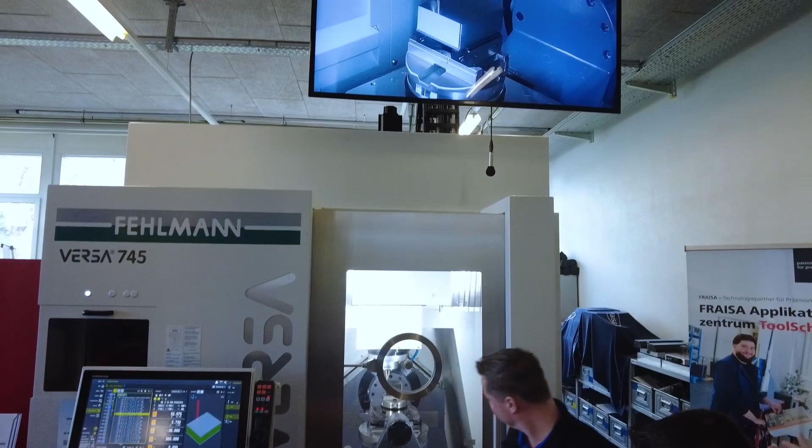That is a really long cutting edge, up to 6.3 times the diameter. And look at that, he's now in action. You said, no, that's not possible - but you can machine with a tool like that, and it is possible, Tony. This is now a roughing process with this high dynamic strategy, and finally we can also do finishing, and it's impressive. The tool then finally gets into a plunging - you have to see that when he has finished the outside contour in milling. Look now at the chip breaker, look how small the chips are, look how safely they fly away from the workpiece. So that was not only marketing, this is really the story. And now we have a look at it.

What are we getting ready to see? What's going on? Now he makes a small stop. Now he's ready. Now comes the plunging. This is exactly what we discussed previously. It's almost like we know what we're doing. We know what we are doing.

We have a saying in the US that I'm not sure is appropriate here in Switzerland, but when someone says you can't do that, we say, hold my beer. And then we do it. It's kind of like what you're doing here, isn't it?

Please be calm, lie back, have confidence. Yes, Tony, we know we are here on a technical level really, really high. He changed now to the high dynamic cutting. Look at the chips, how they come out. That is what I showed you before with the video.

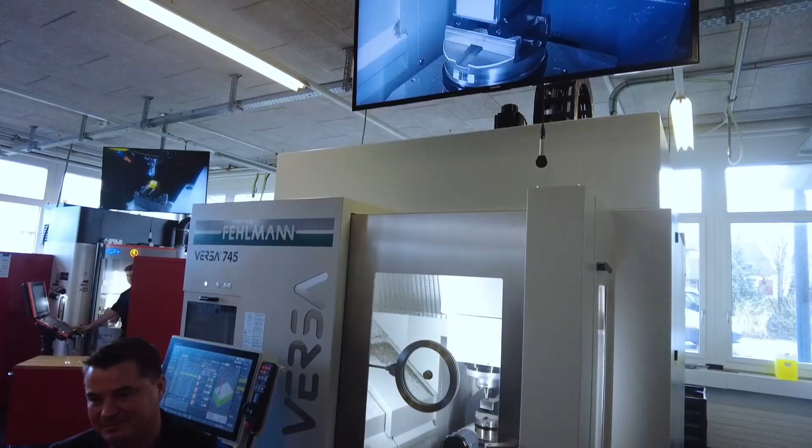It has to be with our culture that we are transparent, also internally. That's the reason we're doing validation of what we are doing - can we hold that, what we are doing? For sure, we learned also, Tony. Not always we had a hit on the market, and that's also important that we discuss critical and make a lesson learned, coming step by step to this real story of what we are working for day by day. And finally, the customer, if in a call, hey, what's going on? That's working. So it's taking him by hand also for the future, for new projects.

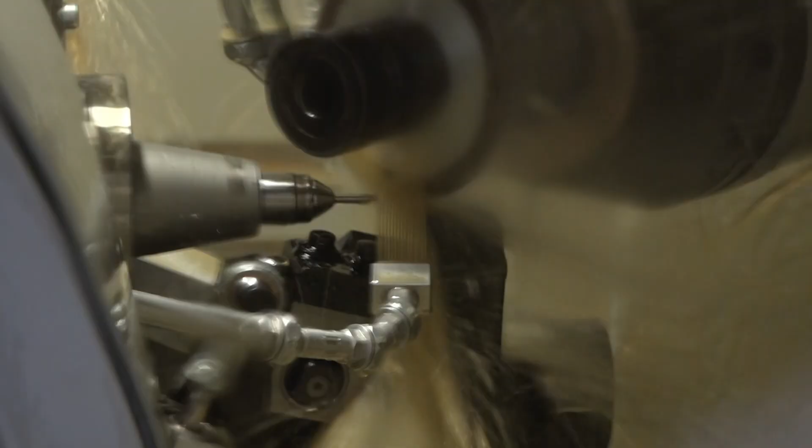Well, let's slide right over here as we conclude this incredible tour. Personally, let me say thank you for allowing cameras in - it's not every day we get to come into this facility. I see that every machine is running, from R&D to retool, to production, testing, and live streams, making sure everyone has equal opportunity to be educated by you at the same time. We have partnerships that are important - none of us can do this on our own.

Are there any closing statements, as my pockets have gotten real heavy today? I may or may not have snagged some of your stuff, but any closing statements you'd like to say, just in general about Fraisa - the company, the people, the products - and working with all the amazing companies out there, as well as inviting them to give you guys a try?

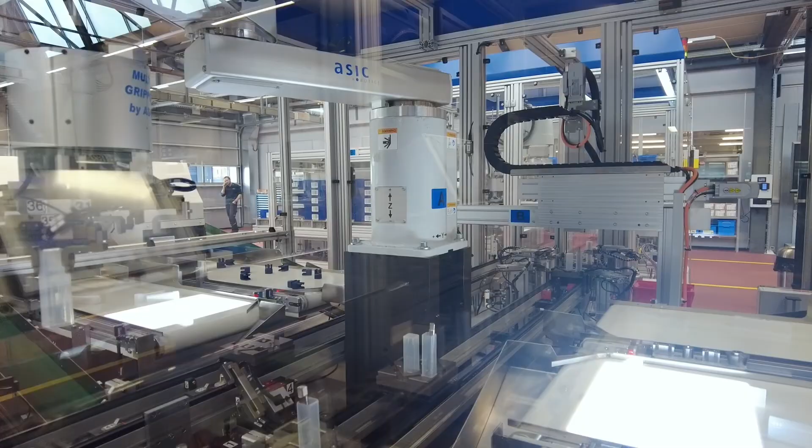Thank you very much, Tony, for this wonderful feedback - that makes my heart really feel good. And Tony, this is exactly the sense. So I go every day in the morning, I go to work - what is the sense to do that? For long-term sense, that is making together a good story. Having partners makes a good feeling. Going together in the future makes it sensible to invest such a lot of time of our life for that story.

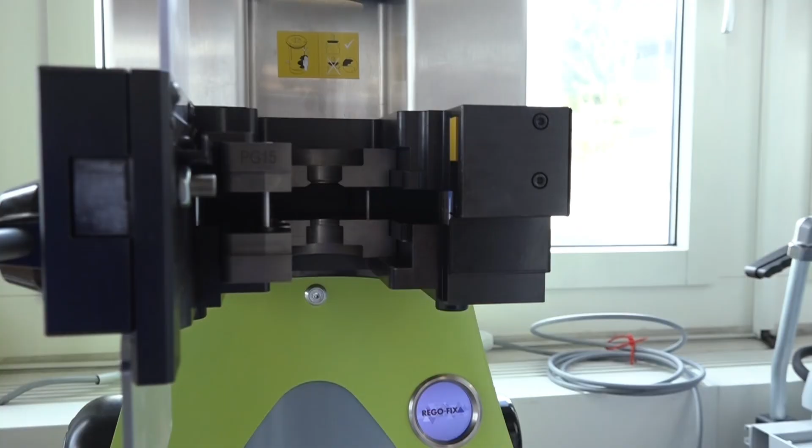That is my intention, to do that day by day with my colleagues, with my partners, to create success - real success stories. That is also our culture, that we go on in this process, and there is still a lot of potential - I see still in R&D a lot of potential. My pockets are filled with tasks, and I'm really happy and thankful that I can do that also in the future.

Would it be less manly of me if I cried from your passion? I mean, I'm an emotional person, and your passion gives me chills - it makes me want to shed just one single tear.